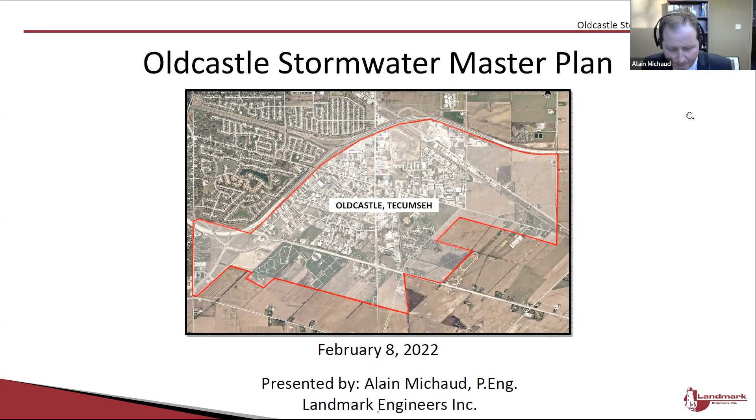So this is just a bit of a key plan and site plan to situate those who don't know the Oldcastle area. We're south of Highway 401; the main roads are Walker and North Talbot. Like I said, primarily business park, with a few little residential areas. The Ciociaro is there, just in that southwest corner of Walker and North Talbot, if you can see that on the slide. So that's where we're located. Next slide.

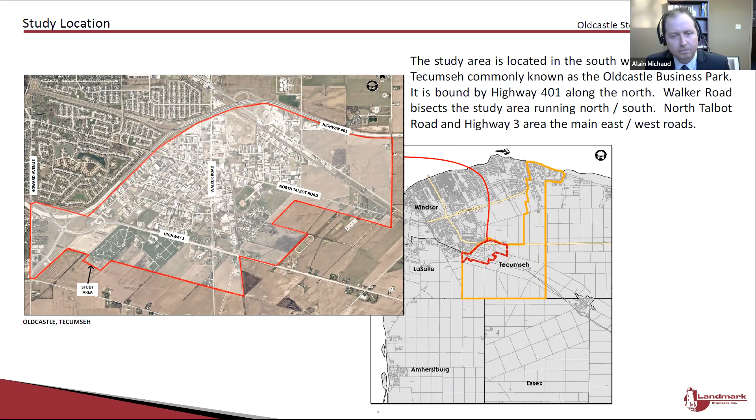So the main objective of the project can be summarized as our problem opportunity statement, which reads: the study was intended to evaluate the current stormwater system capacity of the Oldcastle hamlet, identify capacity needed for the existing as well as projected future demands, and develop a strategy to implement proposed improvements.

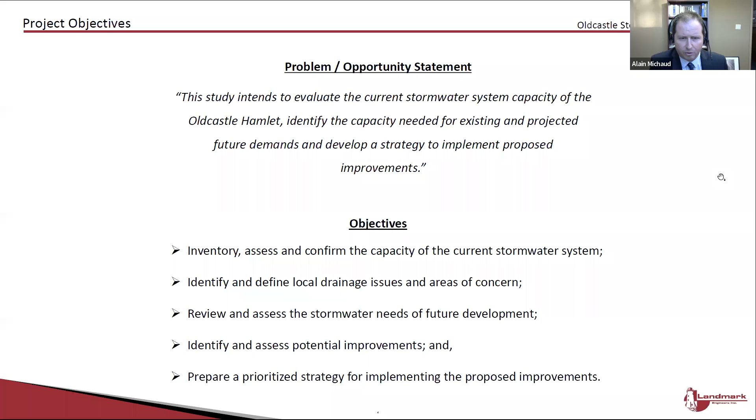Some of the steps we've taken to achieve that include inventory, assess, and confirm the capacity of the current stormwater system, identify and define local drainage issues and areas of concern, review and assess the stormwater needs for future development, identify and assess potential improvements, and prepare a prioritized strategy for implementing the proposed improvements.

The study did follow the environmental assessment master plan process. We followed that process for master plans approach 2, which addresses phase 1 and phase 2 of that process.

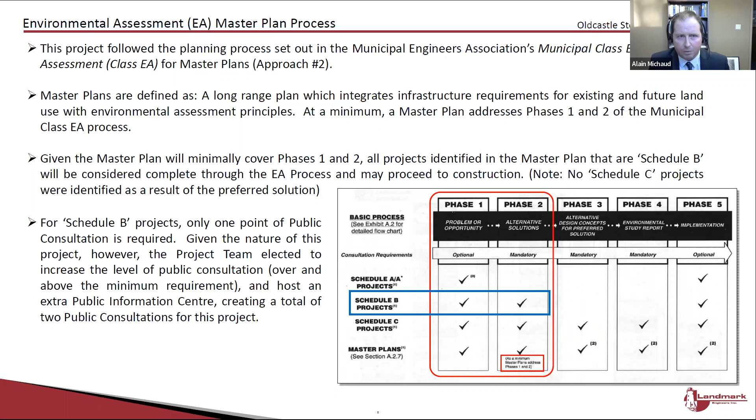As Phil had said, Liz Michaud is on the call as well. I'll be presenting most of the slides, but she is on as a delegate to answer any specific questions. This slide has some additional discussion, but the main intent is that we were following that process.

Again, quite a bit of text here, but the take home is that there was quite a bit of public consultation. We believe we went over and above the EA requirements. We had 2 public information centers and numerous letters to key stakeholders throughout the project, including any stakeholder where a property was involved, whether for a stormwater pond, easements, or new sewers.

We're proposing, or even surface easements for some overland relief, as we'll present in subsequent slides tonight. All those affected stakeholders received targeted letters, and we got great feedback from those. So quite a bit of consultation took place. We also had info packages that went out to First Nations throughout the project.

So just a bit of context here on the current stormwater system. The overall context within the study area is that we're at what we call the headwaters, or the high end, of 3 separate watersheds within the region.

We have the area in red, south of Highway 3, going towards River Canard, flowing in a southwesterly direction. Then we have the area in yellow, the Wolfe Drain subwatershed, that ultimately ends up in Turkey Creek, heading more westerly. And then the area in blue is part of the Little River watershed. So those 3 watersheds, with some sub-watersheds defined as well.

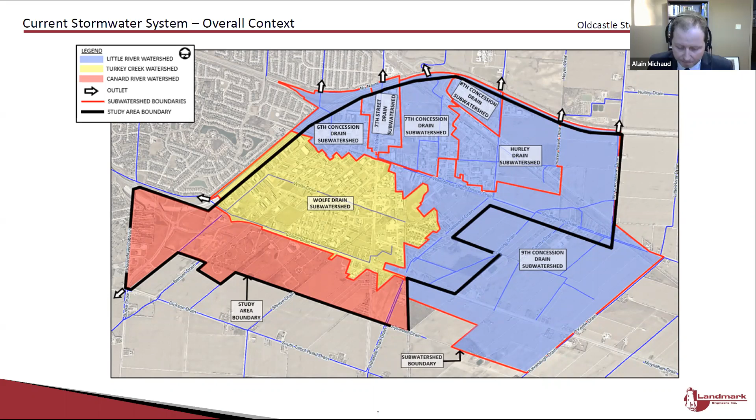In the next slides we'll get into a bit of the analysis, our findings, and our modeling approach. In order to analyze and assess the performance of the existing as well as future proposed drainage system, we undertook a detailed hydraulic model of the study area as well as its downstream receiving bodies, again going into the city of Windsor and the town of LaSalle.

The model approach consisted of a dual drainage model. We were modeling both the minor drainage system, which consists of the storm sewers, drains, and culverts, as well as what we call the major system, which is your overland surface routes, primarily modeling the streets as well as other surface features. We undertook a calibration based on actual field observations from 5 separate flow monitoring locations and 6 separate rainfall events collected over the course of the study.

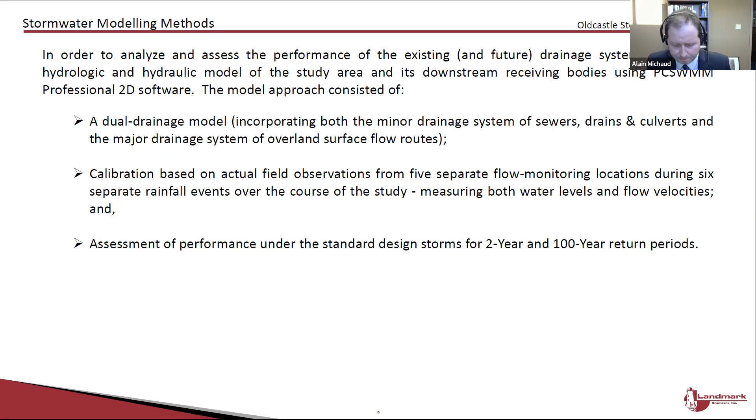This is where you start getting into some access issues. Even arguably at 0.3 meters, you're getting into access issues for some vehicles. And that is typically the current design standard, the modern design standard for new developments.

So you're seeing that there's a little bit of surface ponding under that 2-year event, but generally the system is adequate. There's a bit of a red node, an issue at the Blackacre Sag, which has had some road closures as part of our study. We have a few photos that will show that. So it's identifying that there are a few problem areas, but overall the system's functioning fairly well.

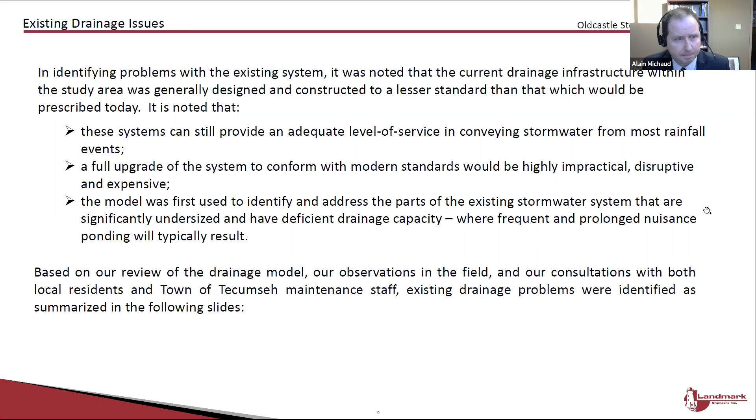Number 2, the Wolfe Drain's experiencing notable downcutting and erosion from high flow velocities. That's happening on the other side of Outer Drive in the steeper and much larger channel between Outer Drive and Highway 401. Number 3, there's a number of these scattered throughout the study area.

Those are local roadways designed with subdrains, shallow ditches, and culvert drainage systems. Many of these are experiencing some nuisance ponding, and some of it is frequent and prolonged.

Number 4, the Blackacre Drive, as I mentioned before, has a low-lying road sag that is prone to deep ponding and restricted access as a result of deficient drainage.

Number 5, at the Hurley Relief branch drain along the north side of the abandoned railway, significantly plugged with sediment, or at least it was, and we'll get to that. That may have already been addressed.

Number 6, the Washbrook drain has significant blockage, approximately half-meter depth, located immediately north of North Talbot Road. Heavy brush sedimentation is evident along the drain from North Talbot Road to County Road 46.

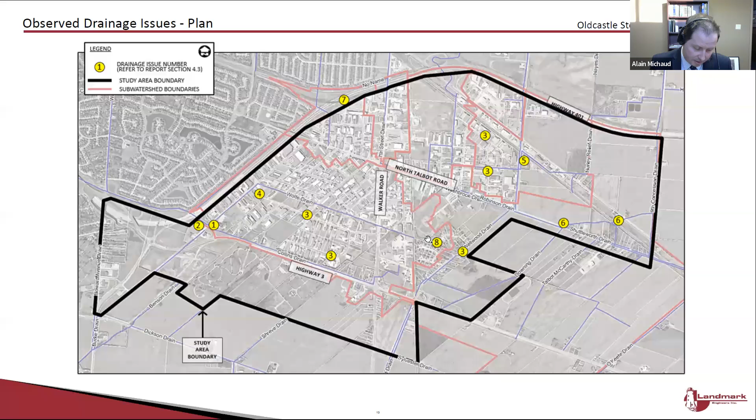And number 8, Castlewood Court has been observed by residents to take a long time to drain. It's suspected that the existing enclosure from Castlewood to Wolfe Drain may be partially blocked. Next slide.

So here, this was issue number 3 we talked about with the nuisance ponding. We talked about some of those existing local roadways that have pre-existing drainage systems that are swales with subdrain and culvert. And generally speaking, when those are new and functioning properly, they can function well.

However, some of the Oldcastle area has been reconstructed and new storm sewers put in that have abandoned this type of system, and we're recommending that some of these other local roadways do the same. And you can see where we're seeing some problems, particularly in some of those areas.

Del Duca, Ure Street are some very good examples where many times there's been some prolonged and frequent nuisance ponding. We have some pictures of that. We've seen it on numerous storms, the very large ones as well as some of the smaller ones.

And the main reason for that is, as you look at some of the examples of the poor or very poor culvert conditions, you can understand why the water is not moving very well through some of those, where the culvert is crushed, mostly crushed, or in some cases fully crushed, as those pictures clearly indicate. Next slide.

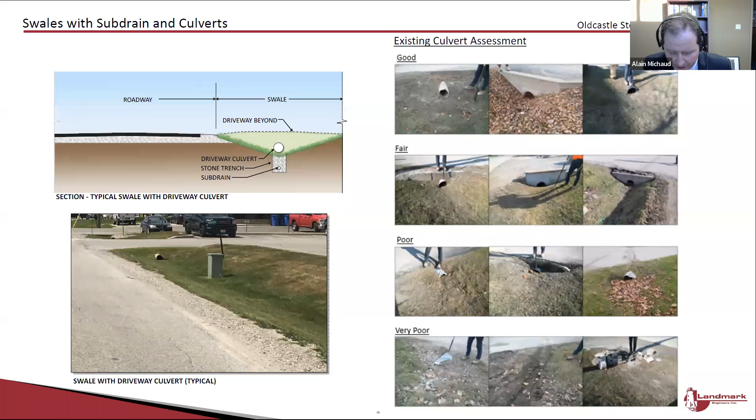I'll go through the overall plan here and review some of the findings. Our review of that dual drainage model for the study area revealed the following deficiencies with the major overland storm drainage systems for conveying infrequent heavy storm events within the study area.

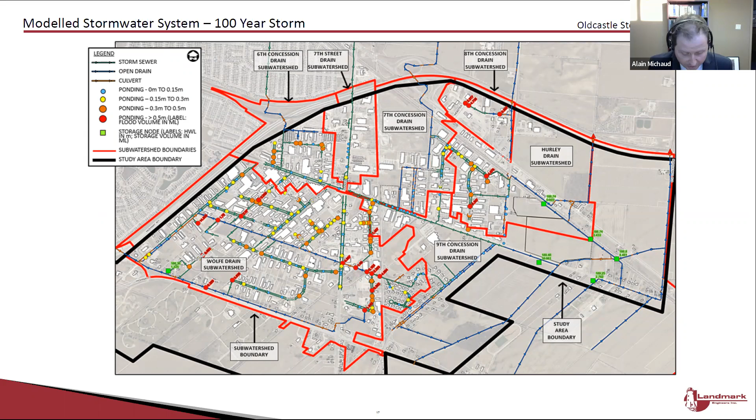Roadway sags lacking a proper overland flow route or proper overland flow outlet were identified along Fasan Drive, Blackacre Drive, Halford Drive, Webster Drive, Del Duca Drive, Ure Street, Dumichelle Street, Morrow Drive, Rossi Drive, Roscon Drive, Olympia Drive, Brendan Lane, and DeChoco Court. In other words, quite a few of the roadways within the study area.

The existing Wolfe Drain along Outer Drive and east of Walker Road doesn't have sufficient capacity to convey stormwater from a 100-year event. We see that clearly with a lot of the red nodes there east of Walker along the Wolfe Drain.

The existing cross-section of the Washbrook Drain between North Talbot Road and 9 Concession Road does not have sufficient capacity to convey stormwater from the 100-year event. And the existing roadside drain along North Talbot Road between Weston Park and 9 Concession Road does not have sufficient grade and is very slow to drain.

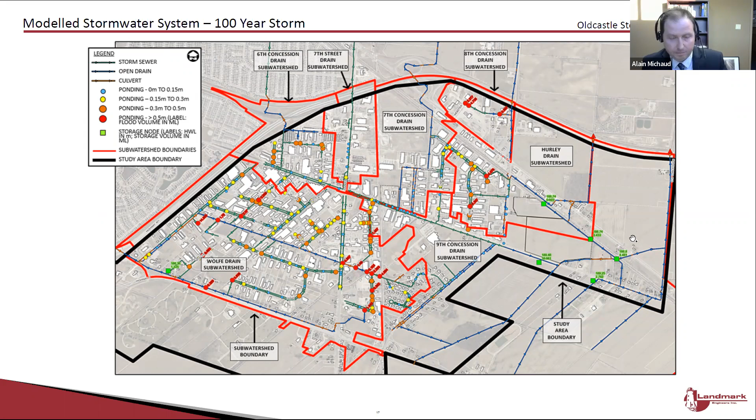So next slide. These next 3 slides provide additional context. They are depression maps, showing a great visual tool for where potentially water could build up. So it's showing all the low-lying areas, or the sags as we call them, or the sinkholes, where areas are low, and how much potential water could build up before it would start to spill.

As we look at some of these maps, we can see it starts to reflect the same issues that the modeling is reflecting. We see some of the sag locations at Blackacre Drive, Morrow and Rossi. We can see those sags, and the colors getting into the darker blues and even the greens and yellows, which is above 0.3 meter surface ponding, becoming a potential issue for access and flood risk.

We also see some low-lying areas along Outer Drive and the connector. This is just upstream of the culvert crossing we spoke of. We've observed water building up along the church property in that corner, so we've observed what this sink map is suggesting, ponding in that low area as a result of that undersized culvert.

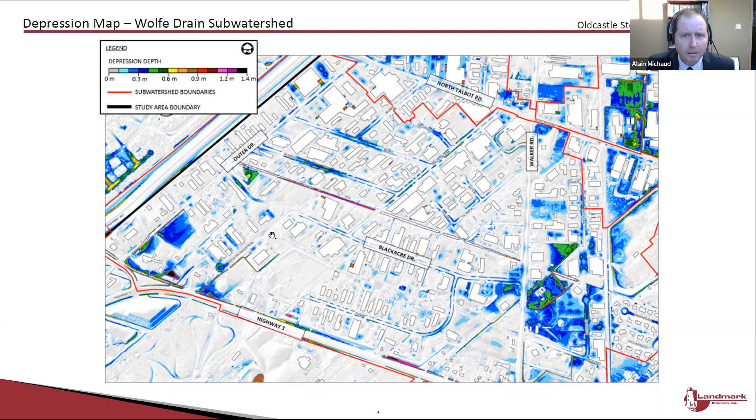So again, more of the same. When we look at Halford, Dumichel, we see some of these areas with potential for more excessive or larger surface ponding depths. We see that as well along Ure Street and Del Duca on the east side of the page here.

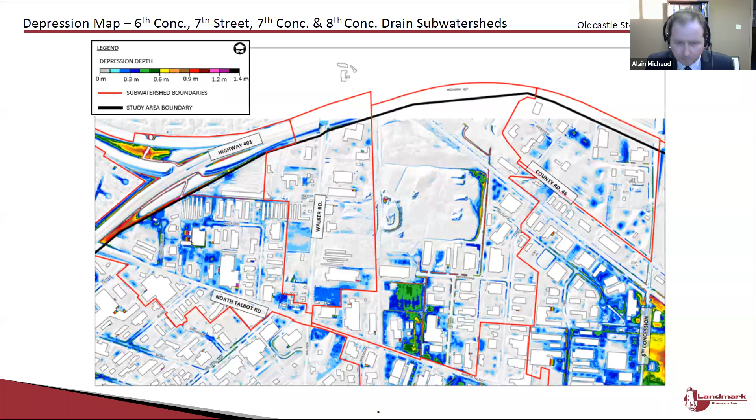These ones get to be pretty colorful, but I do want to clarify again, this is potential ponding. This extent of ponding, when we look into the pink colors and we're talking about 1 meter depth, these are not suggesting that the water would build up that deep, but it's giving us an indication of a lack of an overland flow route.

What's driving these deeper depths is the barrier from the railway as well as from Highway 401. With those land barriers, there's potential for much more ponding, indicating a lack of an overland flow route. As you'll see in subsequent slides with the proposed solutions, it also shows us good locations for ponds.

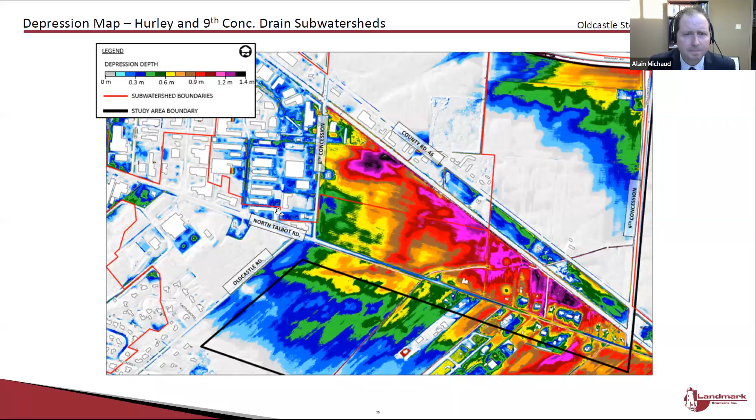But the reason I add that one in there is because, as you'll see in some of the upcoming slides with proposed solutions, we talk about adding new sewers, new ponds. We also talk about adding overland flow routing. In that corner on the Roscon cul-de-sac is an example of where we're proposing to put a curb cut and regrade that land so there's an overland route down Roscon, into the Collins Drain. I'll show that a little more—it'll be clearer with the upcoming slides.

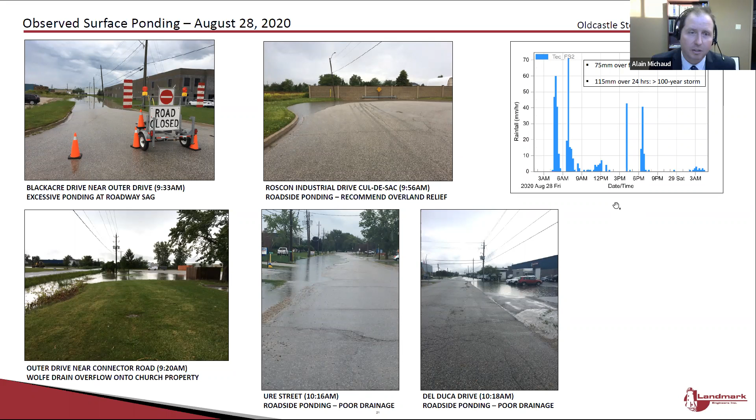So I'm moving into some of the proposed solutions. Firstly, we want to talk about our overall approach. There are two ways to deal with some of the drainage issues and improve the stormwater system capacity: one is to increase conveyance, which is to increase the flow capacity of the system, and or to increase storage capacity.

A couple simple graphs there just showing that relationship. If you have more flow capacity, bigger drains, bigger pipes, you can convey more flow and you need less storage volume. Conversely, if you have very low flow or conveyance capacity with your drainage system, then you ultimately need more storage volume to attenuate or dampen that peak flow.

As you can see, that's the representation of the yellow being the volume that exceeds the flow capacity of that system. So here, as I mentioned before, we're draining into the town of Tecumseh—sorry, town of LaSalle and city of Windsor.

So we are constrained, and we're at the high end of 3 watersheds. We're quite constrained because we're limited in how much we can direct to those receiving drains in the neighboring municipalities. So we're somewhat challenged or limited—we can't simply add bigger drains and bigger pipes, and if we do so, we have to offset that with storage. That's what you'll see in some of the subsequent slides—that's the solutions that came out of this study.

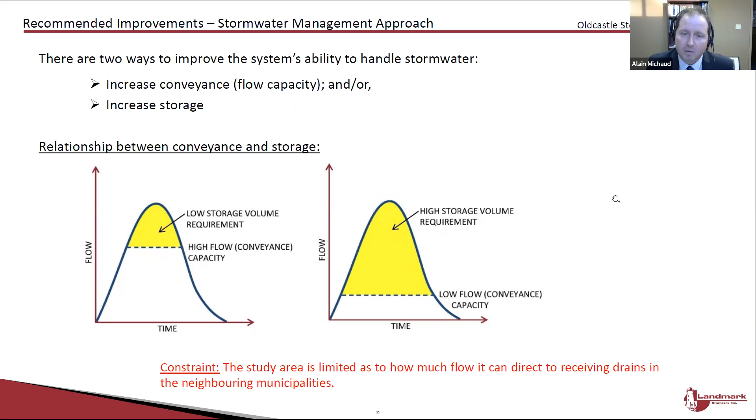Next slide—we're actually going to move over 2 more slides. So just to show the visual, and then I'll speak to those improvements. This is an overall plan showing the improvements within the watershed.

You've got the orange lines representing new sewers, the dashed blue lines representing new or improved drains. Again, the yellow is representing areas where we're providing some overland flow routes, either by simple regrading or perhaps just by securing an existing easement through an existing area or land that currently provides overland relief.

So we're either establishing, securing, or maintaining an overland route. Some areas have an existing unplanned overland route, and in those areas we're simply establishing that it needs to be maintained as a proper easement so it doesn't subsequently get obstructed, built on, or filled in. In other areas, as I showed with the Roscon industrial cul-de-sac, there's actually a curb cut and a little regrading involved as part of that overland flow route improvement.

So just to go through a summary of these improvements: we're talking about new storm sewers along Fasan Drive, Blackacre Drive, Del Duca Drive, Ure Street, Castlewood, and Oldcastle Road.

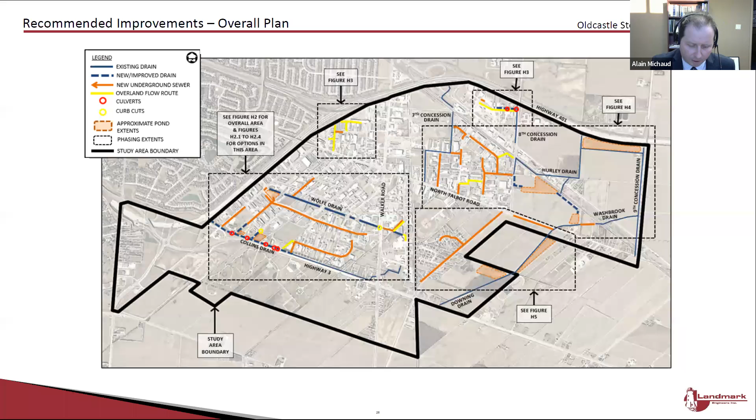As with these slides, there's quite a bit more detail into the sizing and the different pond names, as I've summarized. One point I wanted to show is that we're showing the phasing as part of these recommendations. These plans are in the report and they show how things need to be sequenced, with W standing for Wolfe Drain improvements, and sequence numbers 1 through 5 representing the individual projects.

I've also spoken about the overland flow relief at Roscon. You can see it more clearly here, where we're calling out at the cul-de-sac of Roscon Industrial Drive the yellow circle, and the 1.5 meter wide curb cut, regrading the boulevard. So that's shown more specifically on this plan as part of our recommendations.

I also wanted to point out that we have 4 options for the outflow of the Wolfe Drain across Highway 401 into the city of Windsor. Those individual slides are H2.1 to 2.4, shown in red. Those individual options as part of the recommended solutions for this area we're not presenting today, but they are in the report.

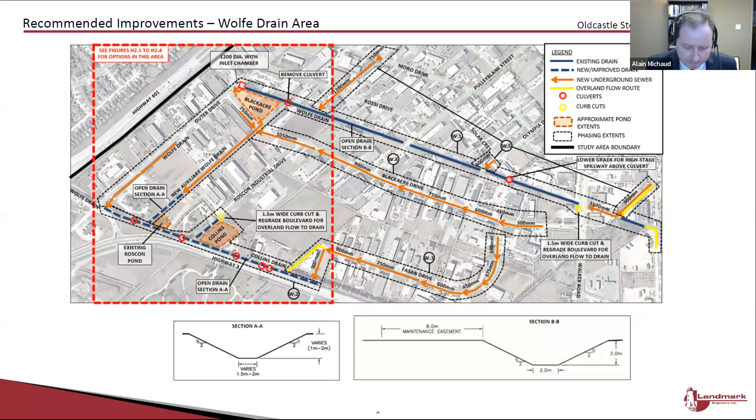Again, this slide zooms in, showing more detail on the pipe sizing for the storm relief flows, as well as some notes on the overland routing—either maintaining existing routes currently in place or doing a bit of regrading. It's calling out more specifics on how to implement those recommended solutions. Next slide.

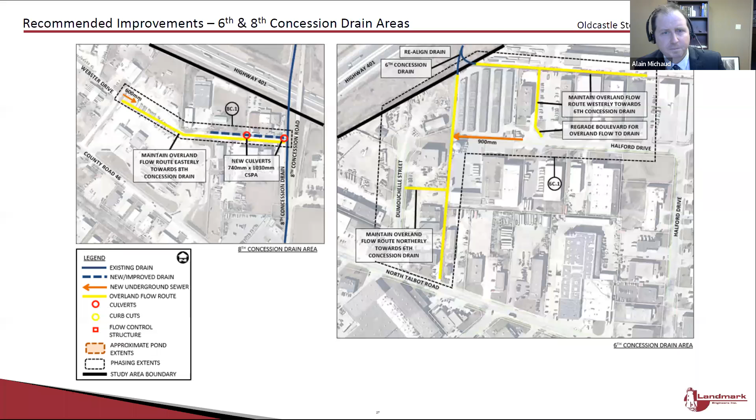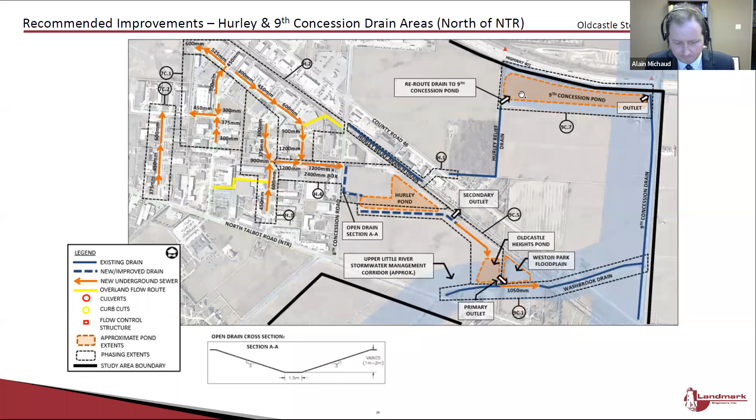And the 9 Concession Pond is again another example that is primarily developer driven, in place to service primarily future development. There is a recommendation ultimately for the Hurley relief drain to be rerouted into the 9 Concession Pond, but primarily that's a development driven pond. Next slide.

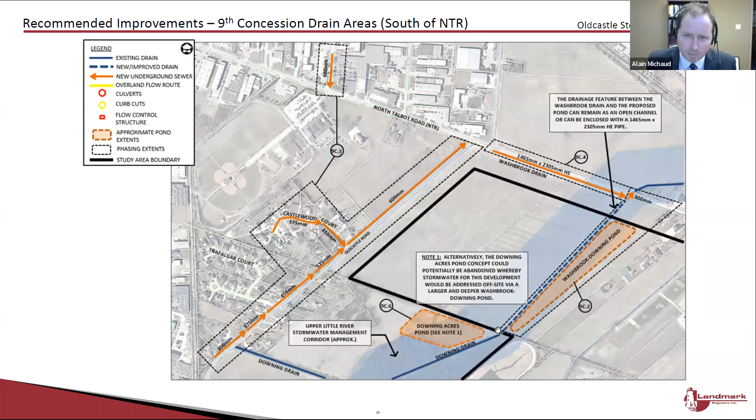Next slide, or actually move to the next one after that.

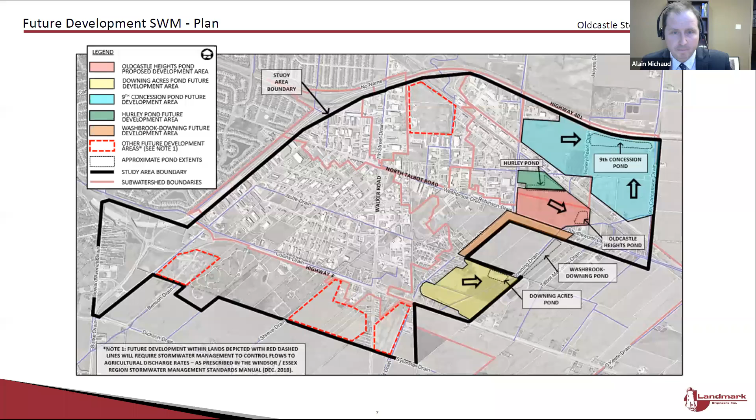When we talk about infill development, so a lot of the business park area that's already developed, or some lots that may still be vacant, or others that have built one phase and want to do an addition, or add a shed, or maybe just pave existing gravel. There's quite a few of these. Historically, they can be challenging to deal with, and you have an area that's been developed in somewhat of a fragmented fashion.

So now through this master plan, we've recommended and are providing some guidance that's clear and concise and easy to apply. We're also providing some flexibility on how to deal with different sites and providing very easy to use formulas that provide clear and concise criteria in terms of allowable release rates and storage volumes. That will really streamline reviews and approvals, making things very consistent across the board from one property to the next. And where we provide a bit of

variation is to be able to deal with different types of developments. Generally, those infill developments will fall under a normal criteria. So they will follow these specific formulas where they simply plug in their impervious level and the overall property area, and then they have those design criteria, and that's consistent for most properties.

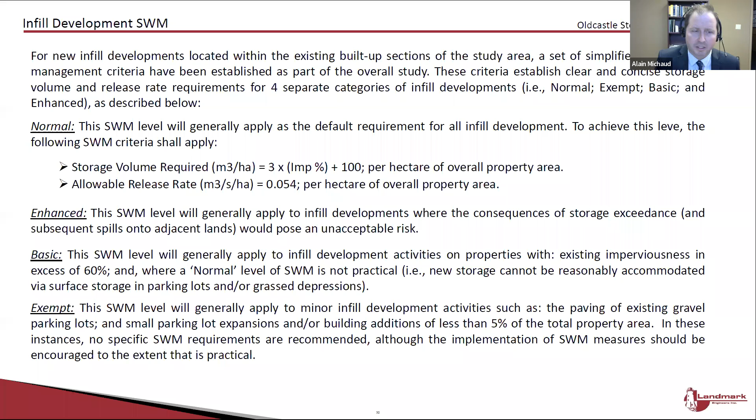Then we're summarizing costs as well, as short, medium, long term, for a total of 32 million overall. Again, 8.6 million of that is the development driven stormwater projects, primarily the 3 ponds we talked about: Oldcastle Heights Pond, Downing Acres Pond, and 9th Concession Pond.

A few notes on some of these as we zoom into just a few of these projects here.

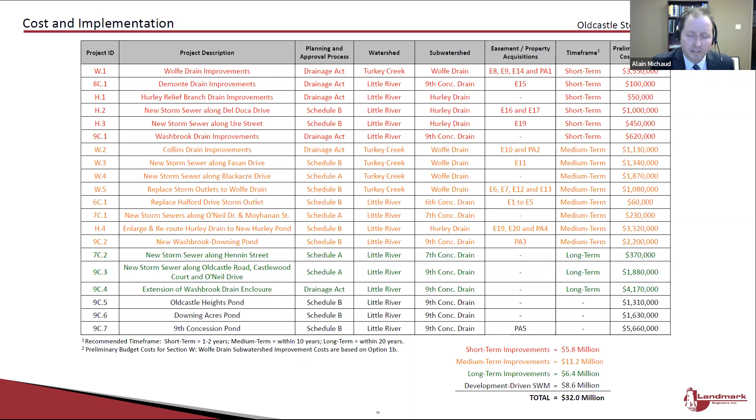And with that, next slide, I'll open up to any questions.

So I don't lose my train of thought - there was a lot of information there, Mr. Michaud, that you talked about, but you made a reference to the southern portion, like Oldcastle, and it looks like it's potential for hamlet development, and basically the comment was as they develop, we'll have to go back and deal with it at a later date. Would it make sense though - I'm not saying to do the project, because obviously we don't know what would be built there - but the concern I have is that what we've seen in other areas, development has occurred, then it's been quiet, and then 10 or 15 years elapse, and then you go out and start dealing with storage or ponds and so forth. Then the battle starts with the developer, and we've seen that in areas. Does it make sense somehow, or does it just not make sense, to do preliminary work and say, look, here's the site, and if it's hamlet development, how do you connect it onto a drain? Do we retain water or just add it on downstream? Wouldn't it make sense to at least have something preliminary so that landowners or whoever goes to purchase... it's not like we seem to be at the starting gate all the time, and then it becomes problematic for the municipality.